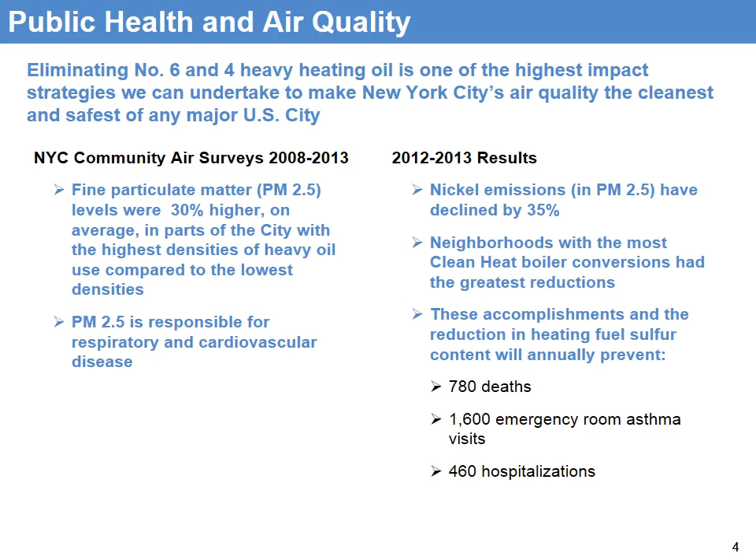These accomplishments and the reduction of heating fuel sulfur content will annually prevent hundreds of deaths, thousands of emergency room visits, and hundreds of hospitalizations. So it's an important public health issue that we're undertaking here.

This is a little visual to help back up what I was talking about earlier in terms of the air quality and the reductions of emissions back in 2008, 2009. You can see the hot spots of nickel, which also coincide with particulate matter emissions. And then in 2012, we conducted the same kinds of tests and saw great results, significant reductions. You can see that just by seeing these two maps here.

But there's still a lot more work that can be done. We see some of these hotspots still exist. Midtown, Upper East Side, Upper West Side, parts of Northern Manhattan, and the Bronx can still use some improvement. And this is what we're trying to tackle in this last year of the phase out of number 6 oil.

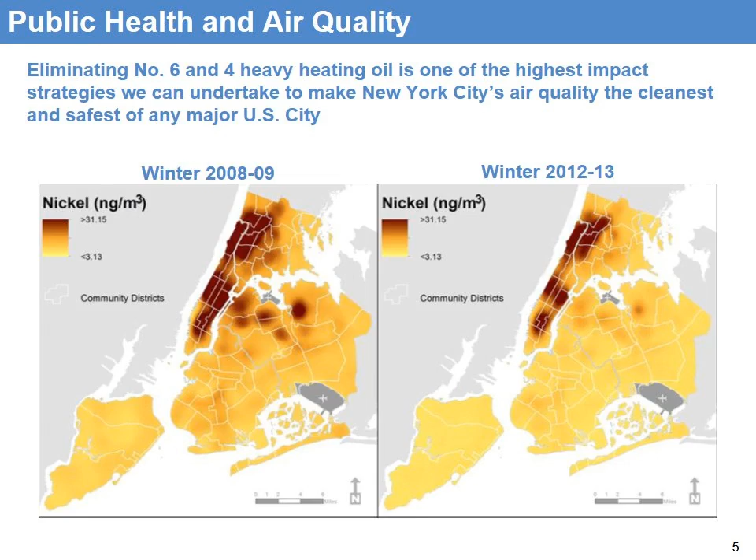So when we saw that these particulate matter emissions were the result of boiler heavy heating oil use, these regulations were put into place. In 2011, the DEP finalized their regulations to eliminate heavy heating oil use in New York City. Phase 1 was to get rid of number 6 oil. So as of July 1st, 2012, DEP will no longer approve certificates of operation for number 6 oil, nor will they renew them.

And since these permits are issued on a 3-year basis, the very last permits will be expiring from now until July 1st, 2015. So most permits have already expired. There's still some buildings that are coming up on expiration in the next few months, and this is what we're trying to address. Phase 2 will be to phase out number 4 oil.

Number 4 oil still contains and results in really high particulate matter emissions. Therefore, we are also trying to eliminate that from use in New York City. And the phase-out date will be 2030. However, most buildings will most likely have to get off of number 4 before that date as a result of boiler and burner replacements. So whenever you have to replace a burner or boiler, you will be required to at least go to number 2 oil.

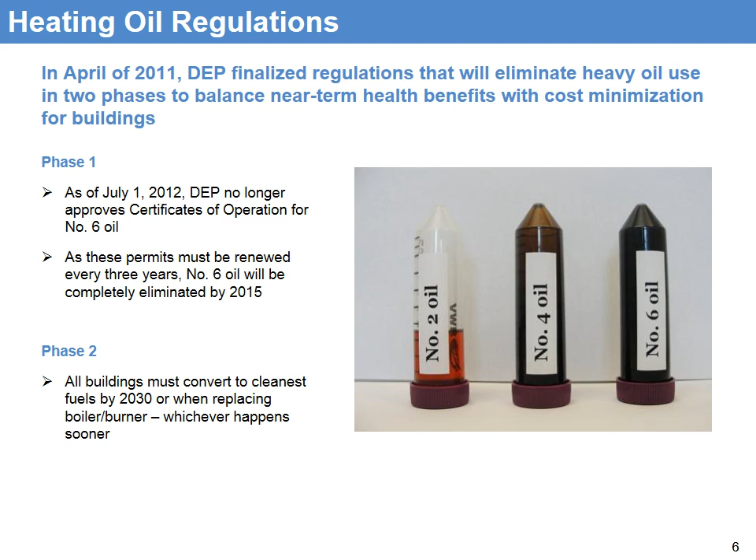You will no longer be permitted to be on 4 or 6, which is why as part of the program we highly recommend and really encourage people to skip number 4, go straight to number 2, natural gas, biodiesel, or any other alternatives that are available. Just from the picture here, you can see how it's pretty easy to visualize why these heavy heating oils are heavy. The impurities come out as a result of combustion, and they end up in our air. So this is why number 2 oil is a lot cleaner and better for the city.

Just really quickly, who is eligible for clean heat assistance and which buildings need to comply. These are going to be buildings that are permitted by the DEP as a result of the size of their boilers. Usually it's around 40,000 square feet and above. If you're above 40,000 square feet, you will be required to have a permit, and if you're permitted by the DEP, you need to comply with these regulations. And if you have to comply with these regulations, you're eligible to receive help from us in the form of free technical and financial assistance.

And if you're not sure if your building has to comply, if you have a permit for DEP, you can always check our Spot the Soot map at nyccleanheat.org/spotthesoot. You can just type in your address and see if your building or if your neighbor's building is burning number 6 or number 4, or has since moved to a cleaner option.

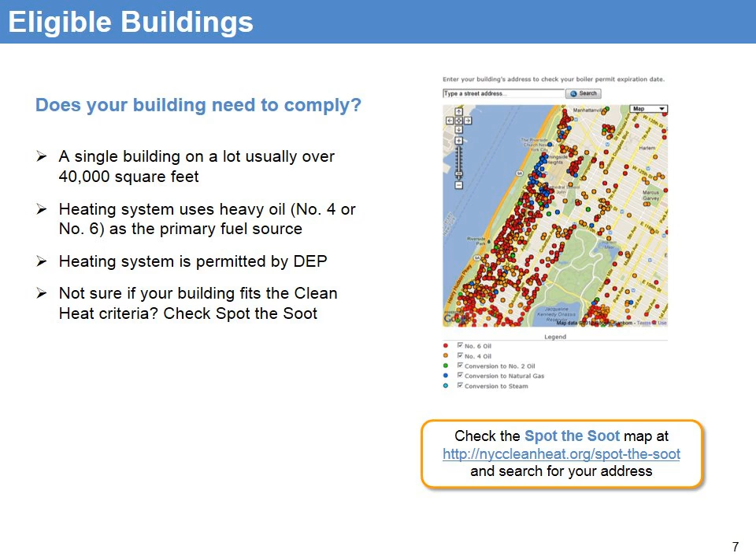And the target fuels that we encourage folks to convert to, I already spoke to this a little bit earlier. We encourage conversions to number 2 oil. We call it ultra low sulfur number 2, desulfurized and better for emissions. Biodiesel blends: the city currently requires B2 in all fuels, but we encourage folks to take that even further, go to B5, B20, which is basically 20% biodiesel and 80% number 2 oil or whatever other fuel you have. You can take advantage of additional incentives from the state. There are some rebates for biodiesel blends.

Also, natural gas is another good option. Prices are at all-time lows, smaller PM 2.5 emissions, smaller carbon emissions. Steam, and any other alternatives that are available to your building, whether it's geothermal, cogeneration, solar thermal. And we do not encourage folks, again, to go to number 4 oil, and 6 is definitely out of the picture in the next few months.

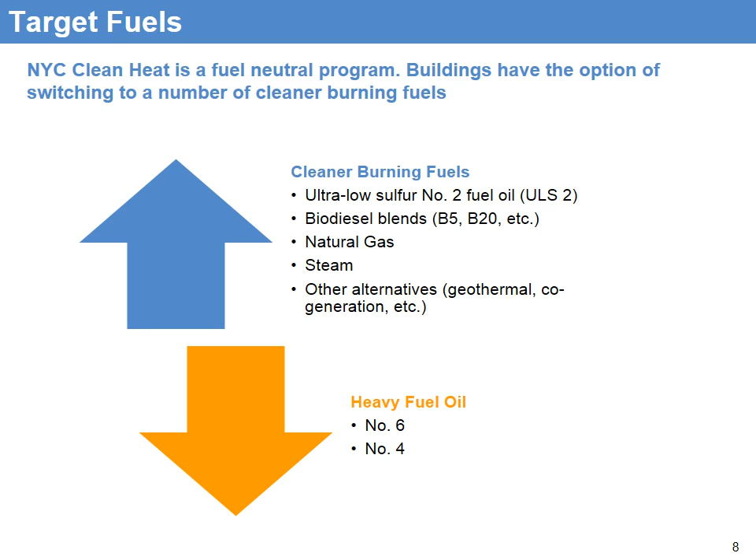So the need for the regulations was observed. The regulations were put into place, and our program was put into place in an effort to assist folks with the process. We provide free technical and financial assistance to buildings that are permitted by the DEP and are required to convert. We have staff on hand that will guide buildings through the conversion process every step of the way. We work very closely with the utilities, industry leaders, trades, anyone out there that's involved in the process to really get you to where you need to be.

And we provide strategic and custom recommendations to each building. We'll come out and meet with your building, with your board, with whoever represents your property to explain what we do and why it's needed and the best way to go about it. We can also provide financial assistance, mostly in the form of financing, which can assist buildings with the construction cost and the conversion cost. There are a number of financial partners that work with NYC Clean Heat to provide you with the necessary funds to complete these projects.

Because number 6 and 4 are so inefficient, and the cleaner options are not only cleaner but also more efficient, most of the time the paybacks are really good, and in some, if not most cases, buildings that take advantage of financing will see very short payback periods, and in some cases with zero money out of pocket necessary to do the work, if that's the way you want to handle such a conversion.

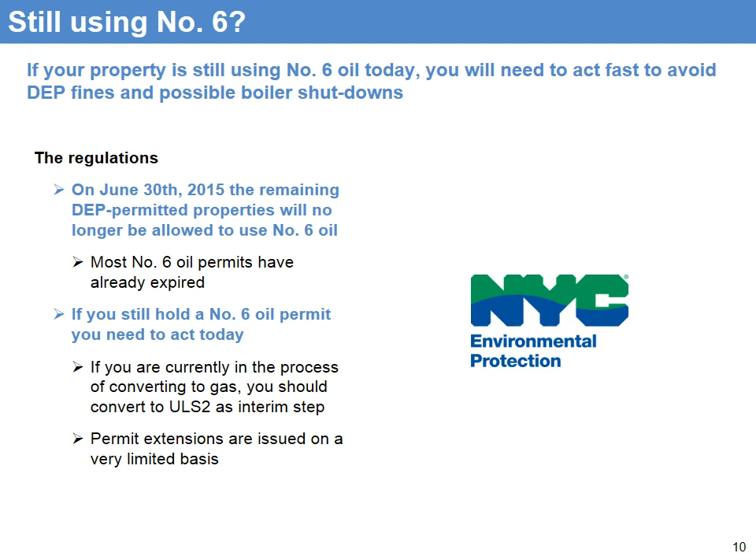Permit extensions are issued on a very, very limited basis. Only a handful have been issued, and they're only in specific cases where DEP recognizes that you're at the very, very end of the process. So buildings that say that they're in the process, it's not good enough. You do have to do something as an interim step in order to get into that compliance first.

So get into compliance. The first thing we would recommend doing is just to get in touch with us. We will look up your building, figure out when your permit is expiring or when it has expired, and help you to figure out a specific strategy and path towards compliance. We would also recommend that you try to convert as soon as possible, preferably before the heating season. We're very close to the heating season right now, but that doesn't mean that work can't be done in the next few weeks or months to get into compliance and work towards a cleaner fuel.

Converting to ultra low sulfur 2 is what we recommend to get into full compliance. Again, since number 4 oil has a phase out date already, since number 4 oil doesn't have such a great price difference compared to number 2, especially during the heating season, and because it's still a heavy heating oil, we recommend that you go straight to number 2, get into full compliance, and move on.

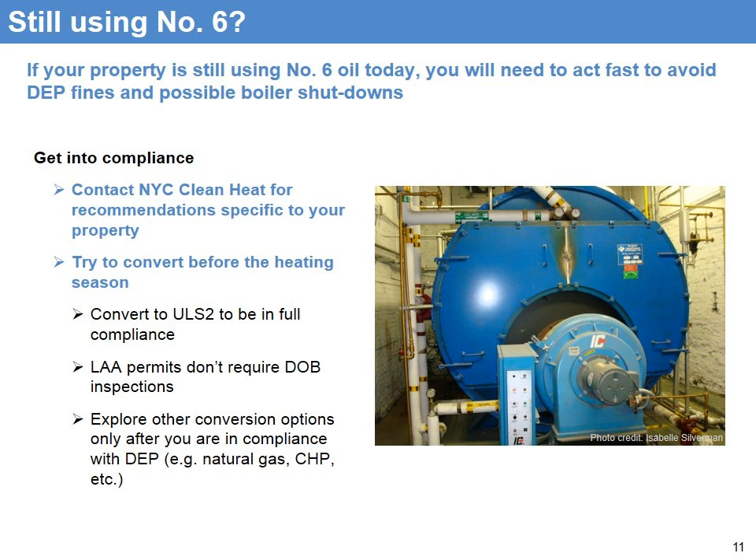And only after you get into compliance or figure out a path towards that would we recommend that you look into other conversion options. You can take your building further, looking into natural gas as an option, CHP, solar thermal, anything else that's out there, but those may demand a longer project period. First think about the compliance piece, then move on to the possibly greater energy efficiency options.

Some of the consequences of being out of compliance. Basically, it's the enforcement of DEP regulations. DEP has made their regulations a little bit more strict now in the last year or so of the Clean Heat enforcement. The very first strike is you'll get a notice of violation, but only after an inspector or someone from DEP comes out to confirm that you're out of compliance. A fine will be issued, and your building must comply with the regulations in order to avoid the next step, the second and last strike, which would be a cease and desist order.

So if you don't comply with the notice of violation and don't get your building over to a cleaner option, you will be asked to attend the cease and desist ECB, or Environmental Control Board, hearing, and you'll have to stand in front of a judge, and they will basically give you a path towards compliance and a timeline that you need to comply by.

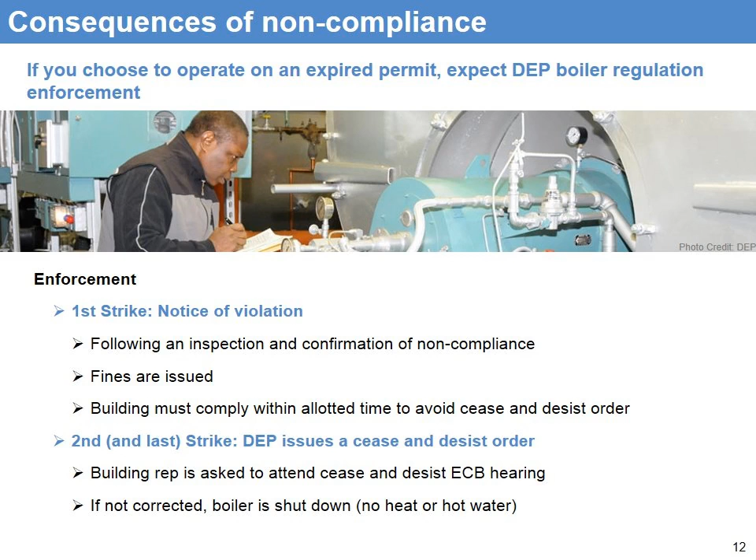And if you don't comply in that required time, your boiler may be shut down. And boiler shutdown is usually not good. No heat and hot water is not something you'd like to have in your building.

So additional consequences: in addition to fines and possible boiler shutdowns, there are other issues that come up that we know about. Obviously, you don't want your building to be out of compliance with city regulations, because that might bring up some insurance issues if anything ever happens. That may be looked at, that your building is out of compliance. We also hear about banks looking at compliance issues during loan processes. It's also an indication of the way the property is managed.

So these regulations have been known for a long time. We've been out there trying to spread the word, offer our help to a lot of people. It's been known, and everyone should really be following the rules. And of course, there are environmental consequences as well. The reason for this program is to improve air quality in New York City. If you choose to not comply, you are impacting the residents of the building, your neighbors, all of New York City, and being in the middle of Climate Week, I think that's a really important point.

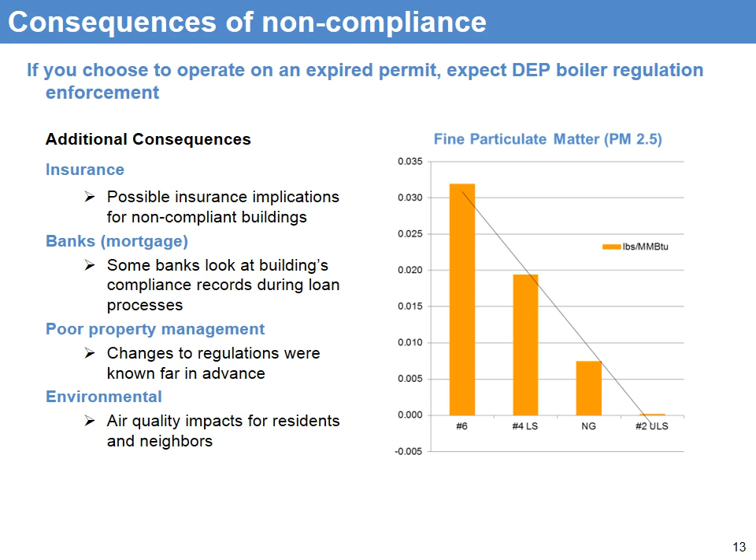And just to show you that, on the right here, we have a fine particulate matter graph, which shows huge reductions in particulate matter as you switch to cleaner options. You can see number 2 oil, or ultra low sulfur 2, and natural gas are significantly cleaner than number 4 and number 6 oil, which is why we're here.

Quick slide about number 4. If you're on number 4, you're allowed to be on number 4 for the time being, as I mentioned earlier. But if your building will soon or sometime in the future be required to replace a burner or a boiler, you'll need to convert to number 2, gas, or any of the other options that are available. But really, we want people to consider the most efficient, cost-effective, and environmentally conscious alternatives. So number 4 is not one of them.

Natural gas prices are at their all-time lows. Everyone knows that. It's cleaner. It's a great choice. Ultra low sulfur is another really good choice from the liquid fuels, and it can be cheaper at times. Actually, especially during the peak of the heating season, ultra low sulfur 2 prices come level with number 2 and number 4 and number 6.

And of course, the soot from number 4 oil is still significant, especially when you compare that to ultra low sulfur 2. So the soot not only pollutes our air and the air of New York City, but it also pollutes your heating system. The heavier the grade of fuel, the more soot buildup you have in your boiler, the higher the efficiency losses you have. If you clean your boiler once or twice a year, which most people do, you're looking at significant efficiency losses over the course of a year as a result of burning a heavier grade of fuel.